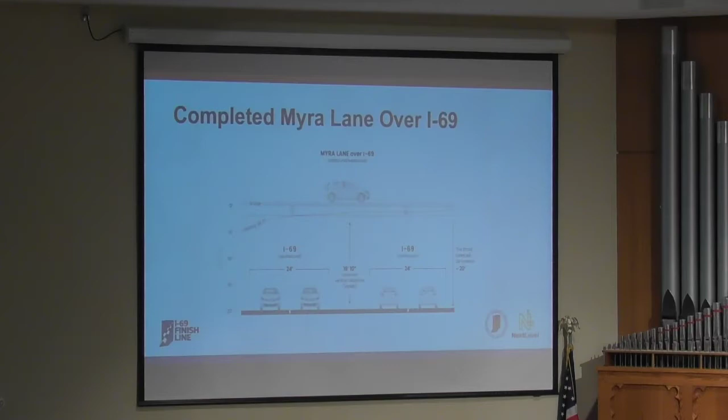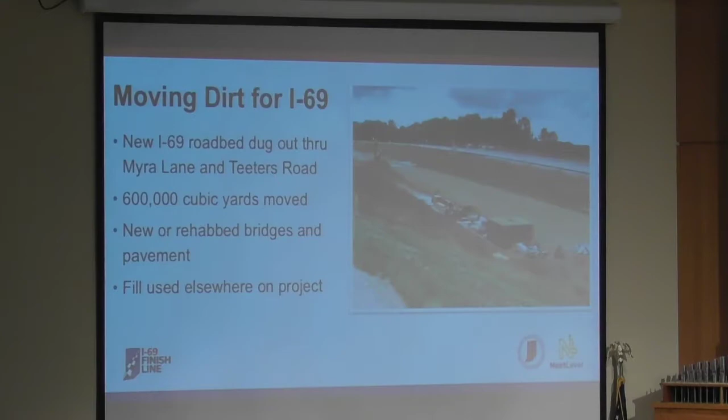And so that is the reason for the phasing of the construction out there as they cut out of the hillside. We're using those materials to build up embankment at other interchanges along the corridor, but that is also what has informed the phasing and ultimately the adjustment in your access as we work through that construction phasing.

So additionally, as I was mentioning about moving dirt for I-69, the materials that we've taken out of that hillside, which is around 600,000 cubic yards of material, so not a small volume of dump trucks by any stretch of the imagination, are being taken to locations where we are rehabbing bridges, adding new bridges, putting embankment for interchanges, really trying to make sure that we were able to utilize those materials in other places along the corridor as efficiently as possible.

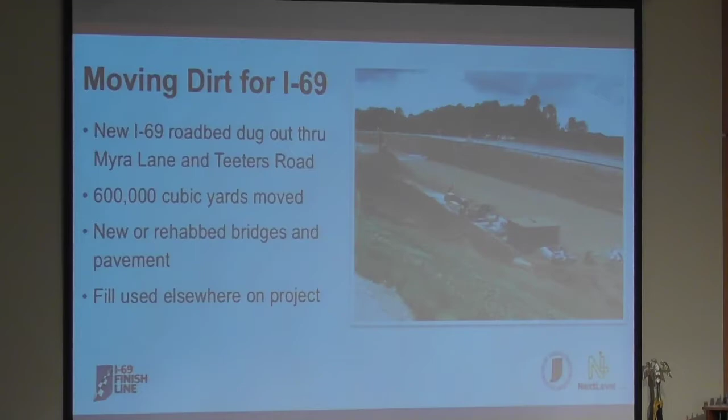I think there are just a couple additional slides. Before, when I was talking about the parfait of the project, we have the NEPA part, we have the stakeholder coordination, but we impact resources as well along the corridor. We impact wetlands, we impact streams. There are threatened and endangered species. We really try not to impact those, but we have to mitigate for all of those things.

And so we have about a half a dozen mitigation sites throughout the corridor. I think all but two are off of the main line, where, in coordination with the Army Corps of Engineers, IDEM and DNR, we identified sites where we do replanting, reforestation, wetland mitigation, to offset the impacts that we've had to those resources along the corridor and throughout the construction. So this is a good example.

No, you're okay. We built Bendway Weirs at one of our mitigation sites out in the White River because there are a couple of locations where the White River, one in particular at Stotts Creek, gets a little bit too close to 37 currently. We'd prefer it not get that close to future I-69. So our hydraulics department did a thorough analysis of how the White River was behaving along this corridor, and the recommendation was Bendway Weirs at a couple of locations to keep the White River's channel where it should remain and less of a meander.

But that's something that's just unique and different. It's kind of out of sight, out of mind. You wouldn't necessarily know it's out there unless you're maybe on a canoe on the White River, but something unique nonetheless as we're going about building this corridor, trying to minimize and mitigate for the impacts that we've had.

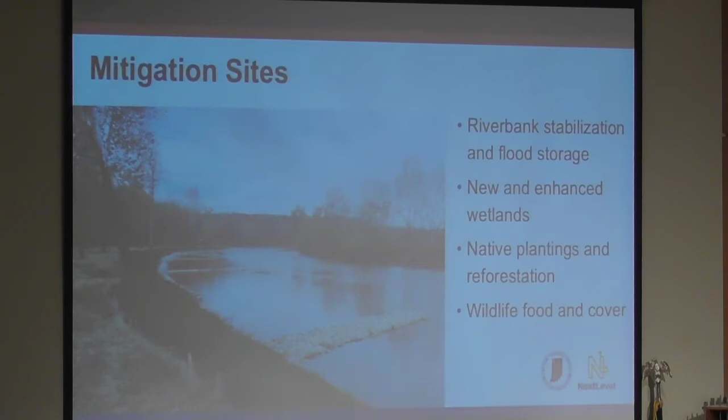There are a variety of traffic shifts, traffic phasing that happen as part of I-69, not only on the main line, but with some of the local access roads. So recently we opened the new State Road 44 bridge over I-69. The ramps will open later this fall.

We have State Road 252 Hospital Drive. Once State Road 44 opened, the connectivity to State Road 252 changed. So folks used to be able to go down those northbound lanes. You now take Reuben to Morgan Street. That's so we can get a jump on building those northbound lanes and building the northbound portion of the bridge.

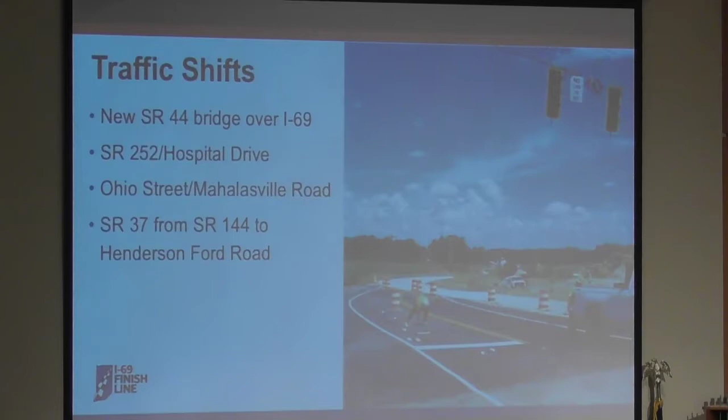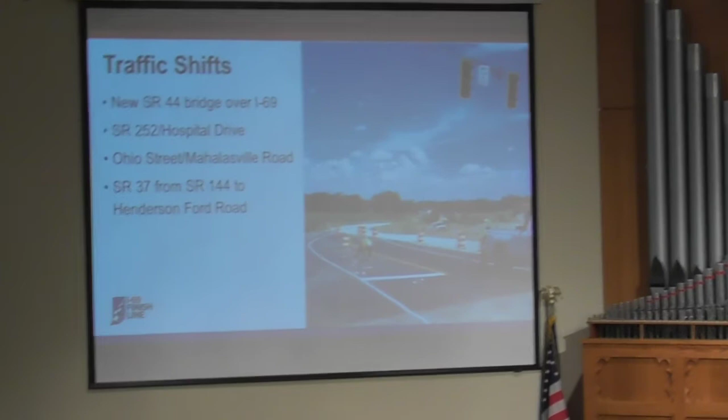And then the Ohio Street Mahalasville Road area is still under progress. It's a work in progress, but Ohio Street does have open connectivity east-west through the area. And then State Road 37 from 144 to Henderson Ford Road, which is what I touched on a little bit earlier with the traffic switching over from being solely on those northbound lanes to now being on the southbound lanes.

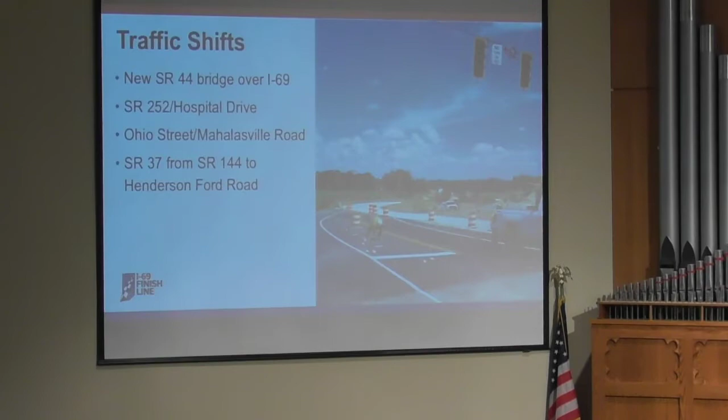And so there'll be a couple of other adjustments, but our goal is to give advance notice on those, to have them well signed so that it just feels kind of like a natural transition when you're out there trying to navigate the new configuration.

So a couple of summer milestones to talk about. So State Road 37 from Egbert Road to Morgan Street, we've kind of touched upon that. Later this summer, we hope to have that open. We finished excavating, we just need to finish paving and improving that connectivity.

Southview Drive from State Road 39 to Burton, that will be open. You're certainly welcome to go to our project website and look at the maps, but State Road 39's interchange will have a roundabout that is part of it, and it will provide connectivity to Southview Drive.

So for folks that want to go to Indy's or want to go to the Taco Bell or the KFC or the car dealership there, they wouldn't have to go to Ohio Street and double back. When it's fully functional, they would just be able to exit at State Road 39 and then use that local frontage road, which would be Southview Drive, to be able to get to those businesses.

So the interchange won't be open until the end of the construction season this year, but there will at least be that connectivity for folks to get up and down that portion of the corridor. And then related to that, Burton Lane will close later this year, and that will be a permanent closure. In our final condition, there won't be an overpass there or an underpass. So hence the importance of that Southview Drive connection for folks to be able to get to those businesses.

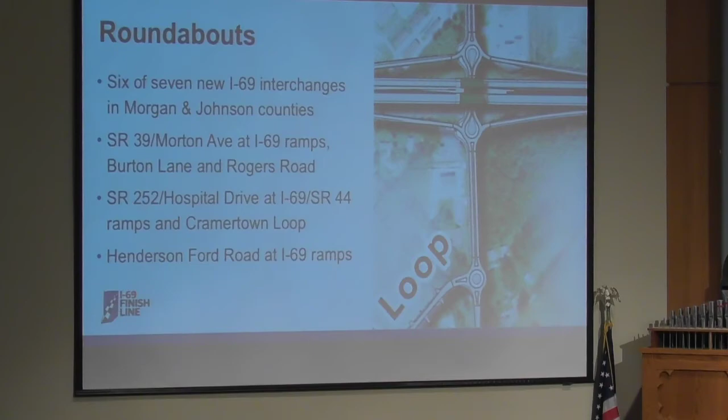We will also have roundabouts at the State Road 252 Hospital Drive and State Road 44 ramps, and also Cramertown Loop and State Road 252. So where there's currently that temporary signal, that's the location we'll be putting a roundabout in later this year. And then Henderson Ford Road has ramps as well with roundabouts. You'll be able to experience those once we get the ramps built out later this year.

Okay, and then I'm going to hand it off to Tim to talk about what to expect and our year-end goals and some additional public involvement information.

I feel like I don't need to talk now. You just got a round of applause.

So, well, good morning. Sarah just went over what was done last year, and even when we started this endeavor in 2019. I'm going to go over what we're going to expect at the end of the year and what we can even expect next year as we wrap all of this up. But as you can see, there's a lot of activities going on.

And obviously we all know about the Myra Lane, and I wanted to put something in context for you real quick. When she mentioned the 600,000 cubic yards of dirt that's being moved out here, does anyone know how many cubic yards fill a dump truck? 12. So it gives you the magnitude of the amount of work that's going on right outside your facility here. And whatever you think it is, you can usually multiply it by 10, and that's basically where we're at. So just a momentous occasion.

So one of the things I want to talk a little bit about is what's going to happen at the end of this year. We're all going through a lot of construction right now, a lot of utility coordination, as Sarah mentioned, a lot of dirt, a lot of mitigation. So these are some of the things that are going to go on. First of all, at the end of the year, we are going to open up State Road 37.

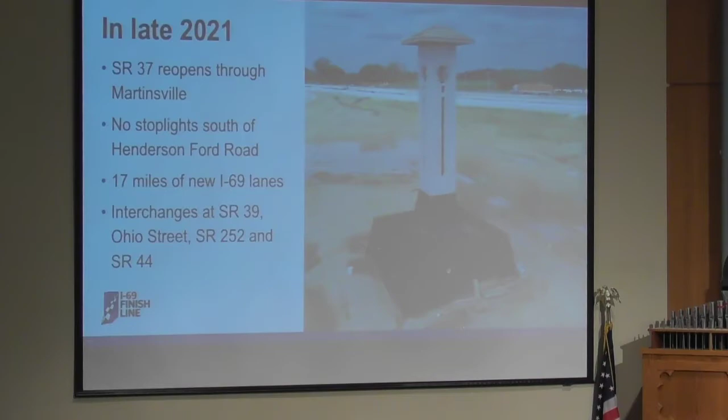These are some of the things about Rogers Road at the interchange. Obviously, with the new State Road 39 bridge, the roundabouts that Sarah mentioned will be at State Road 39. We'll have the Ohio Street interchange. A lot of coordination during the planning phase of whether or not to put an interchange at Ohio Street. But obviously one is being constructed, and you can see that being formed today.

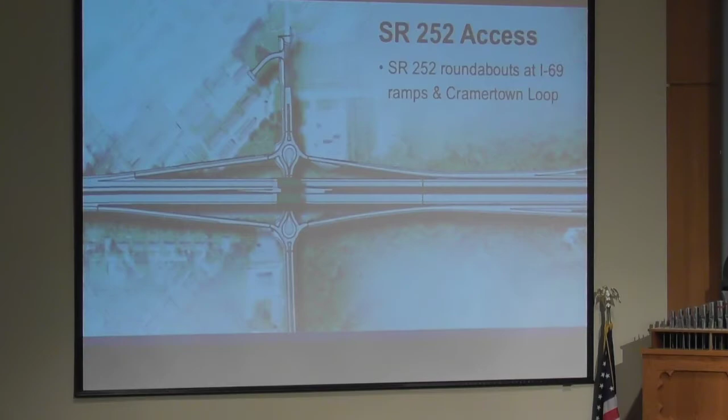We have the 252 access. As some of you already mentioned, we already see the foam blocks for that interchange really being formed up and taking place by the end of this year, with the connections with Cramertown Loop. We'll have a roundabout down at 252 and Cramertown Loop. And then we go into the State Road 44 access.

One of the things on the State Road 44 access is during the preliminary phasing plan, we did not know whether we wanted to interchange at State Road 44 or 252, so we came up with a split interchange so that we could provide access both at State Road 44 and 252. We know those are state roads. We know it's very important to mobility here in Martinsville as well as Morgan County. It's a statewide interest to keep those connections open, and that's how we came up with the split interchange concept at 44 and 252.

One of the unique things that we did here in the city of Martinsville, we've done a lot of unique things. We talked about the Ruth Rusey Way, a great community icon, to honor her and all her contributions to the community. But the other thing that we did is, in coordination with local officials and the local aesthetics committee here in Martinsville, we came up with the concept of monuments. And you can see those being constructed right now, especially down at State Road 39.

If any of you have seen those monuments beginning to take shape, sort of like sprouting out of the ground. Those monuments are about 40 feet tall. They will be a welcoming sign to the city of Martinsville. They're focused on the city of Martinsville.

There was a lot of input from some local community members here. The local chamber had a lot to do with that, as well as the previous administration, talking about how, when we come into Martinsville, how do we know we are here in the community?

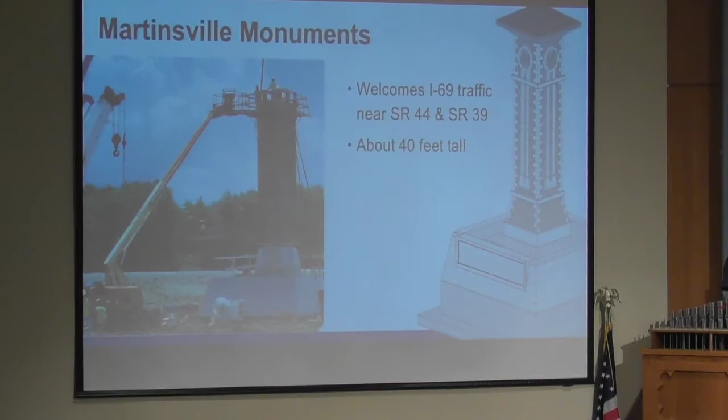A lot of little details in that bridge that if you're driving by, of course you haven't driven underneath it because it's not been available yet, especially until they closed it. But a lot of those little historic things are built into the design there that will last for a generation for those bridges as well.

Looking at what's going to happen next year, we're going to have the Morgan Street extension south of Country Club Road. You can see that grade being done right now. New overpasses at Teeters Road and Myra Lane, obviously right out here, that I'm sure all of you will be excited about. The entrance and exit ramps at Henderson Ford Road.

Right now we have the bridges under construction. You can see the ramps being constructed right now, but next year that interchange will be opened up, and so it'll be a fully accessible interchange early next year. And then we're going to start resurfacing some of the local street networks here in Martinsville: Morgan Street, Main Street, Hospital Drive, Southview Drive.

So before we leave town, we want to make sure that we leave it in great condition. And so a lot of those street repaving will happen next year as well. So all that will be constructed. It will be open to traffic. We'll do some cleanup work. We'll potentially do some leftover seeding, some landscaping cleanup, but that'll wrap up all next year as well.

Follow our progress. Well, again, we have been in the city of Martinsville for a long time. We have had many public meetings in the area. I will tell you, this community, whenever we had a meeting at the Martinsville High School, we'd usually have them here, we'd have them in Johnson County and Center Grove, and we'd have them in Perry Township.

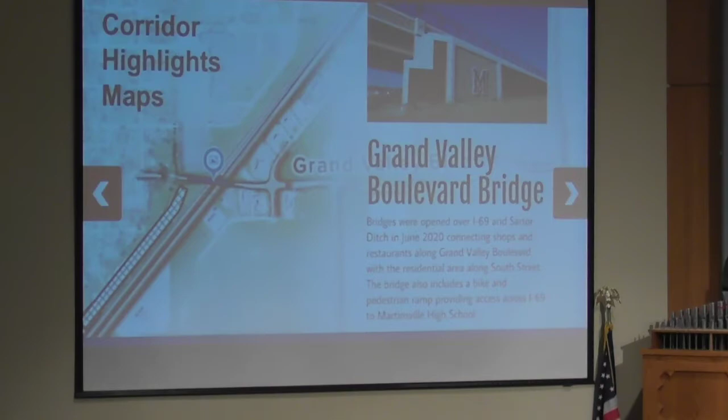We have what we call a corridor highlights map that you can start from the south and go all the way to the north. Obviously, most of you know what's going on here in Morgan County. You may not know what we're doing in Johnson and Marion County. This is something that will take you through like a storyboard that tells you exactly what we're doing, how we're doing it, and when we're doing it, as far as that's available as well.

Construction start maps. Obviously here in Martinsville, you don't need to know when things are going to start. They're already there and they're wrapping up. But north of here, there's a lot of activities going on, especially in Johnson, and as Marion County gets ramped up later on this year and even next year, there'll be a lot of closures. There will be a lot of maintenance of traffic. And so when we talk closures, we're not closing anything off on 37, but we're talking just maintenance of traffic operations that we need to control. So you can visit these maps to see where we're going to be constructing and when as well.

keep people informed. We have a full service customer service team, so if someone sends in an email, we try to respond at least within a day or two if somebody has got a question. We have a fully dedicated customer service team with us that Sarah and I manage to make sure that we get back to the person or organization if they have a question or a concern. So it's a very interactive, proactive type of outreach we're doing, and we enjoy doing it because, again, the project is just